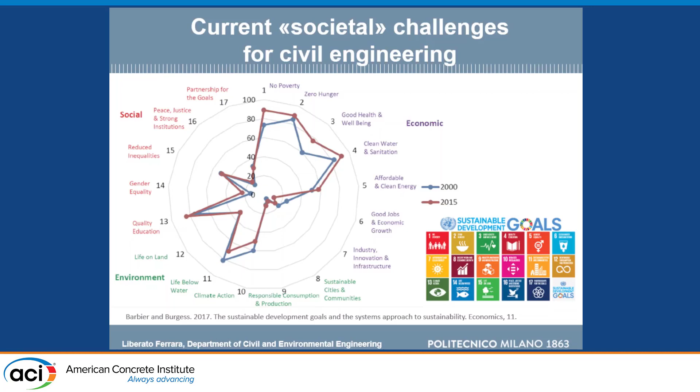We are dealing with sustainability, we are dealing with sustainable development goals, and you can see those going from 7 to 12, more or less, are the ones on which our job as civil engineers, structural engineers has to focus.

We have to cope with the fact that nowadays more than half of the population in the world lives in cities. This means we do not only need buildings, but we need transportation infrastructure for people to go from places where they live to places where they work, for leisure time and so on. This actually requires more and more concrete volumes to be produced, because we do not have alternatives to concrete if we want to build in a sustainable way.

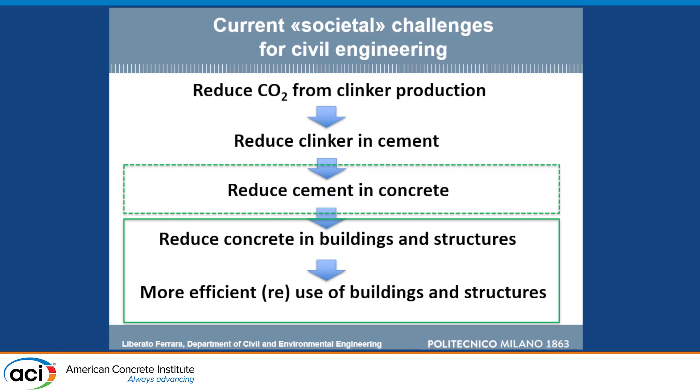But what do we have to do? We have to decarbonize cement production. We have to reduce the cement in concrete, trying to find other alternative ways to make our concrete, and reduce concrete in buildings. This also means we need to look at other performances that so far we have not looked at in detail, but we also need to find the metrics to evaluate this performance.

If we go for ultra-high performance concrete, for example, and only look at the content of cement per cubic meter, we will say that any high performance concrete, any high strength concrete, is not sustainable because it contains more cement per cubic meter than ordinary concrete. But if we look at the efficiency of this binder and this cement in getting the strength, we can say that if we look at kilos per cubic meter per unit megapascal of strength, then ultra high performance concrete is more sustainable. So change the perspective.

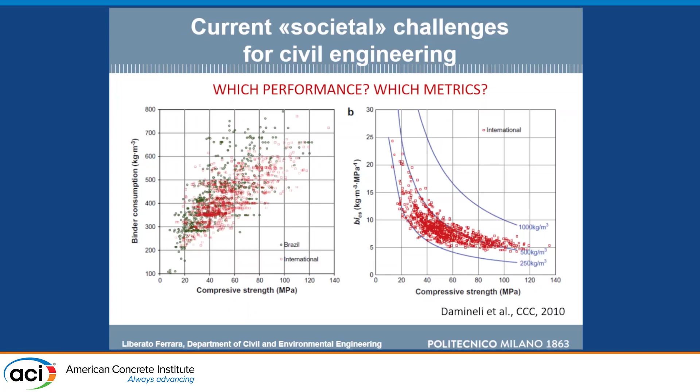And which are the fields in which we have to intervene? In the construction and maintenance of transportation infrastructure. This is our daily life when we have to cope with traffic interruptions and long queues on the highways, if we have to go to work or if we have to go to the beach during summer on holidays and so on.

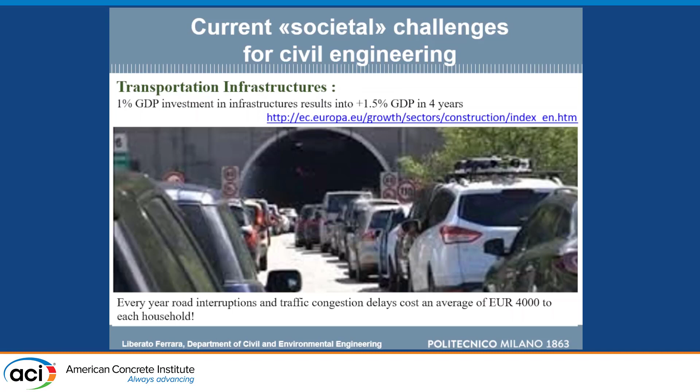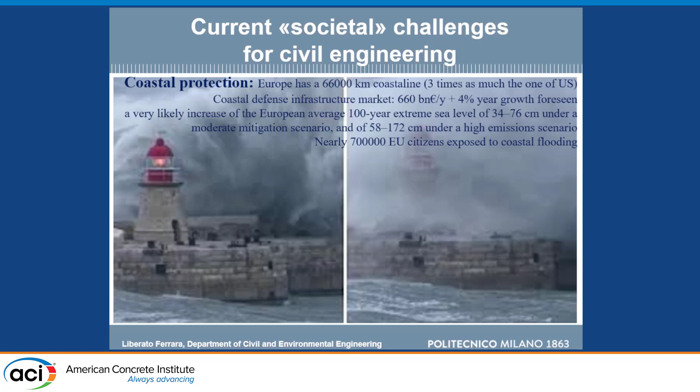We have to deal with coastal protection against climate accidents, against extreme climate events. This is becoming a huger and huger problem all over the world. And we have to contribute to decarbonize our energy supply, because this is the true bottleneck.

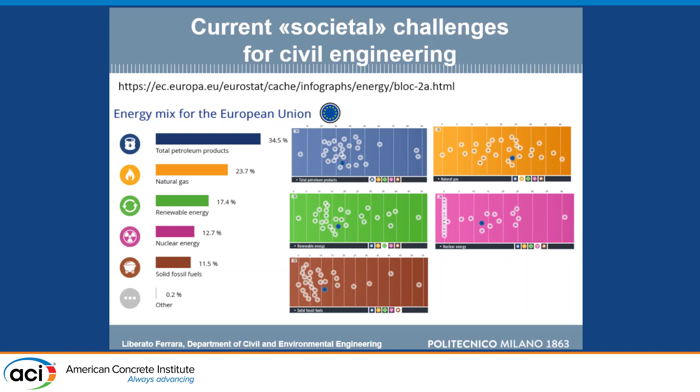Every time, if we can make our production very efficient, it depends on where we take out the power for that production, which makes the carbon footprint higher. So we must invest in renewables, and concrete is the material to be, if we want, for example, to go higher with wind energy harvesting, or if we want to go deeper with geothermal drilling.

In all these cases, the materials are subjected to very severe chloride attack, sulfate attack, very severe structurally demanding conditions for which current code prescriptions are absolutely inadequate. You look in the codes, and for durability, for chlorides, you find maximum water cement ratio, minimum cement content, that any kind of modern concrete can easily cope with and easily fulfill. So where is the driver for innovation that the codes can provide with this?

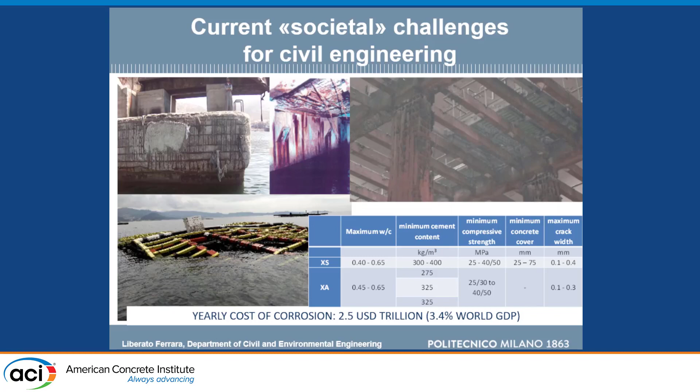So this is the scenario in which, with a consortium of European partners, we applied for funding to the European Commission some years ago. We got funded this project with a consortium of 14 partners throughout Europe, 8 countries, and I had the privilege to coordinate them.

Enel Green Power is an energy-producing company. They do not make concrete, they do not sell, they buy to build their infrastructure. So their interest was at the very last segment of the scale of the end users.

After this project, we applied with some partners for an international training network in which we tried to bring the innovation we developed in the project into education and scale up to the market. This project is now running.

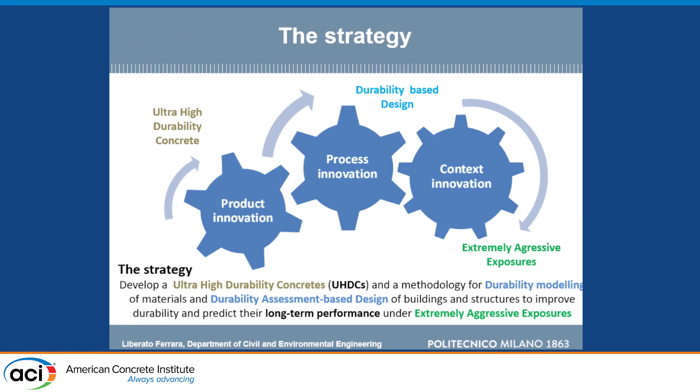We worked at the 3 levels: the product, the process, the context, and started from something which was already in the labs throughout the world: ultra-high-performance concrete.

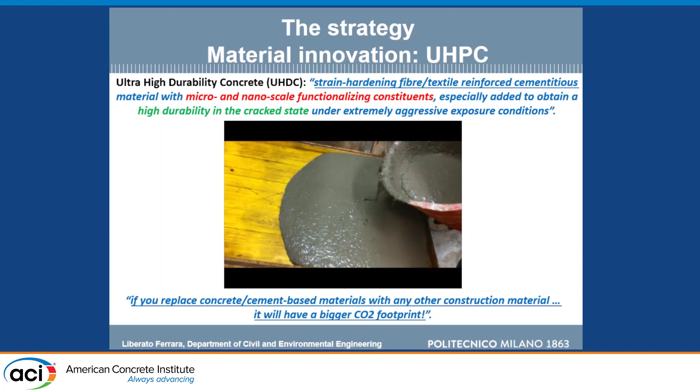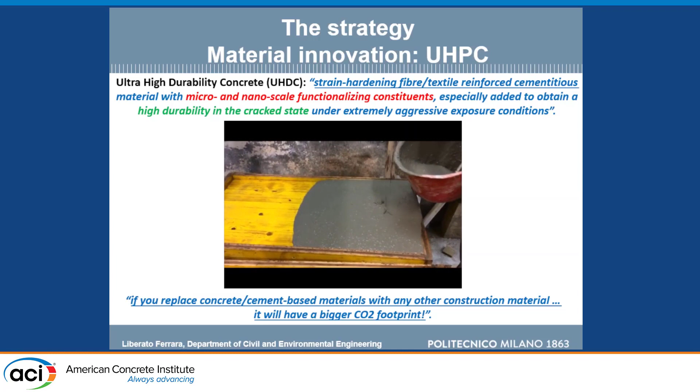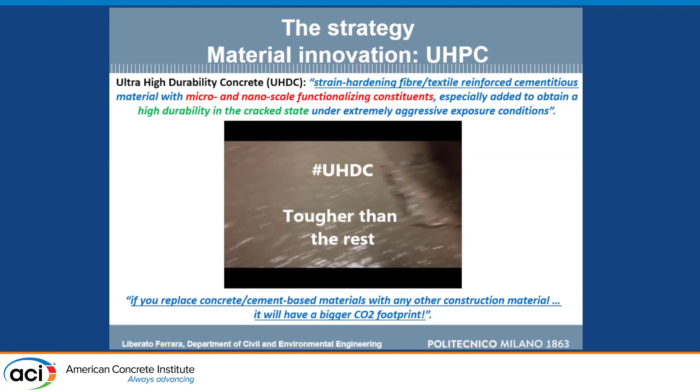The ultra-high-performance concrete, sometimes you find not a complete message delivered. You find only a message on very high compressive strength, 150, 180, 200 megapascal, that when you go to structural design, you never use, because a column cannot be made smaller than a certain size - it's not a matter of strength, but a matter of buckling. And if you have a beam, the tensile part dominates.

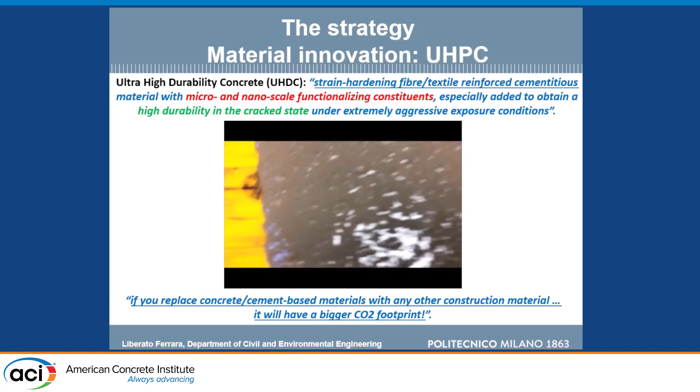So what we wanted to see was the strain hardening capacity in tension and the durability in the cracked state, which was what mattered. We achieved the strain hardening capacity. You can see there we have a strength of about 7 to 8 megapascal, but the strain hardening response up to 0.5% deformation, which is well beyond the yielding of conventional steel in reinforced concrete structures.

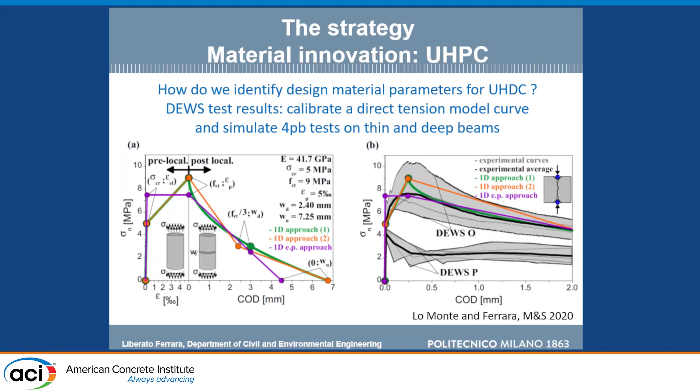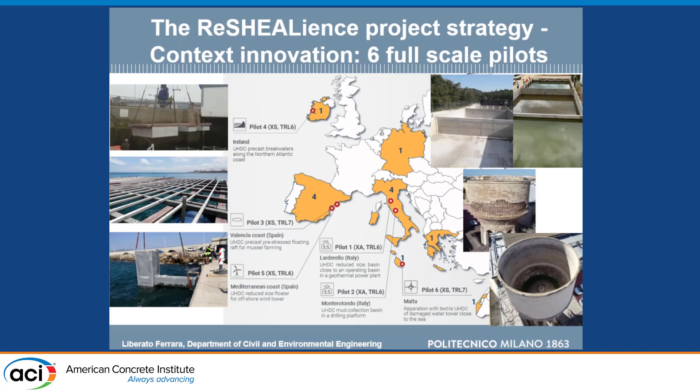Then our problem was, first of all, to scale up, casting half a cubic meter per hour on the construction site. So we had a batching plant there because we wanted to develop full-scale application. Now these 6 structures are throughout Europe, as you can see: Italy, Spain, Ireland, and Malta.

does not work. Okay. Pointer does work, okay. Okay, so probably. Let me see. Yeah, should be this. No, it's lateral pointer. Okay, got it. Yeah. Okay, it's this one.

So if you see this ordinary reinforced concrete solution, 10 centimeters thick with about 100 kilos per cubic meter of reinforcement. With our nano-functionalized materials, if you design the wall as a cantilever, 6 centimeters thick; if you design the wall like a slab supported by columns, you go to 3 centimeters thick, with significant savings in material usage.

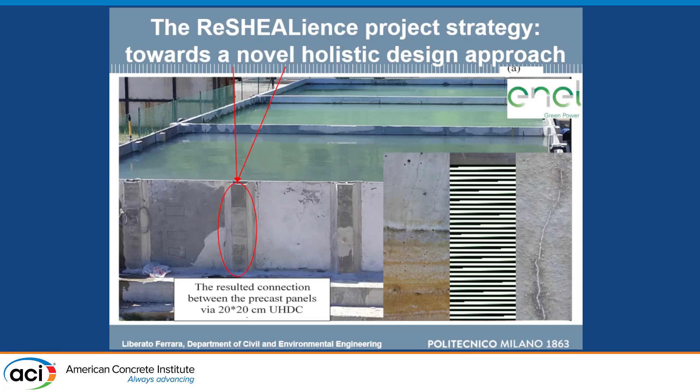This is proof that it can hold water with 3 centimeters thickness. The first load test, we were a little bit concerned. We stayed up front in order to stay safe, but it worked very well.

This is to show the importance of the matrix. If you look at the dosage, the mix design here, you see you have 600 kilos per cubic meter of cement - this mix is not sustainable. But look here: 10 centimeters thick with 350 kilos, you use 35 kilos per square meter of wall. In our case, with 3 centimeter thickness, you just use 18 kilos of cement per square meter of wall. So let's look at the functional unit and not at the unit volume of material or unit weight.

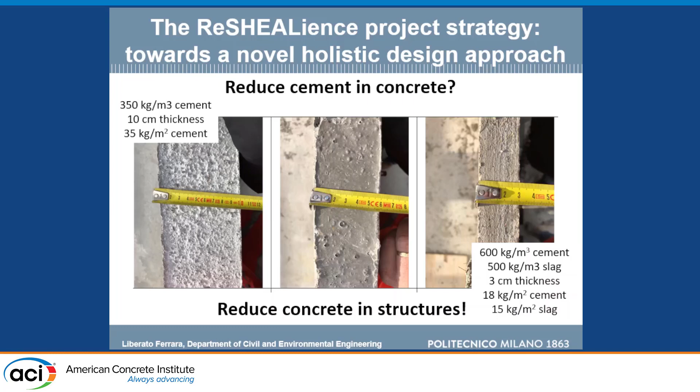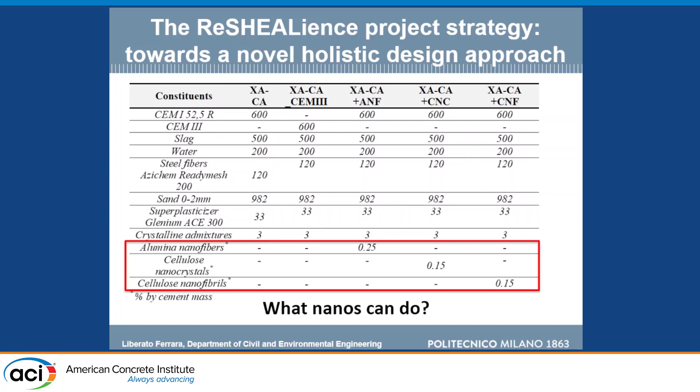Then, as I said, we wanted to strengthen the durability in the cracked state. We wanted to enhance the self-healing capacity, and we investigated the use of different kinds of nanomaterials: alumina nanofibers, cellulose nanofibrils, and cellulose nanocrystals. You can see here some of the characteristics of the materials we used.

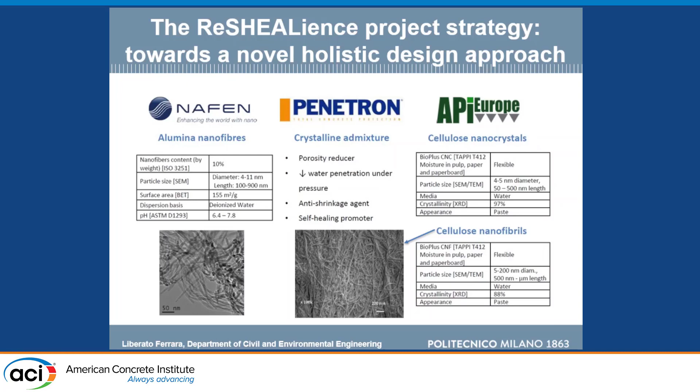For the nanofibers, we had lengths between 100 and 900 nanometers and diameters in the range of 10 nanometers. Similar dimensions, a little bit shorter, but the diameter was still in tens of nanometers for the nanocrystals and nanofibrils. We characterized the mechanical performance of the material through bending tests and indirect tension tests.

What we got, interestingly, was - if you look at the 4-point bending test, you can imagine that in the central part of the beam, you have multiple cracking. This is the key of this material: multiple cracks, each one very, very narrow, very tightly open, and it's good for durability.

With the reference material, the average number of cracks was 7, ranging between 2 and 12 according to the specimen. When we added alumina nanofibers, we had many more cracks in the same zone, which were more tightly spaced. This was strengthening at the very molecular level, which allowed us to obtain very narrow cracks.

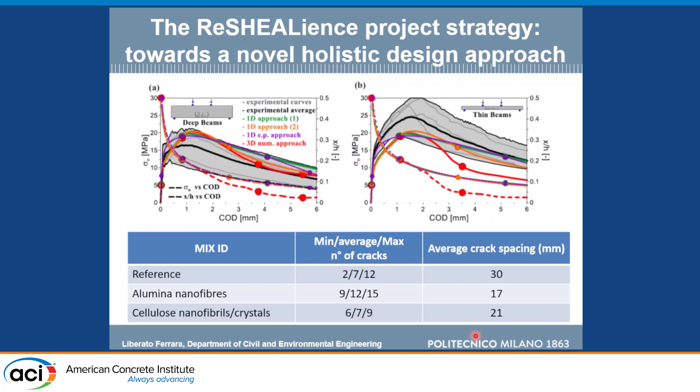So then we wanted to explore, as I said, the durability and the self-healing capacity. What we did with the specimens: we pre-cracked them up to the service design level.

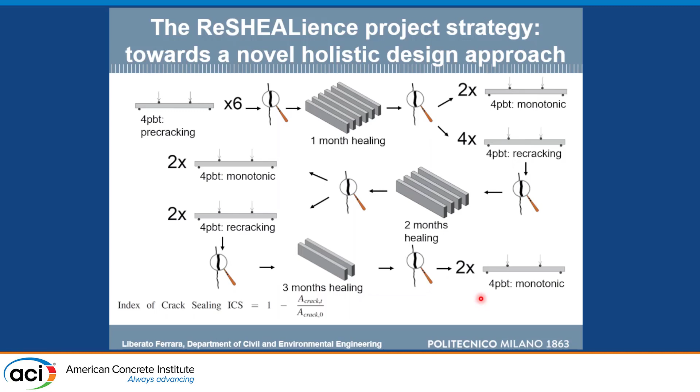We kept healing for 1 month in geothermal water, chloride water, different curing environments. After 1 month, we tested to failure some of the specimens to see the evolution of the performance, but other ones were simply re-cracked and put back to heal.

And also with nanocellulose, we were able to keep the cracks very narrowly open and have an improved self-healing capacity.

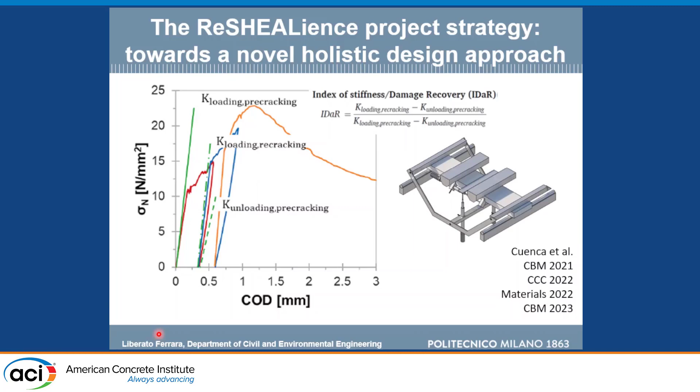This was not only on the closure of the cracks, we could also see the capacity to recover the damage. We intended the capacity to recover the stiffness, the flexural stiffness that we evaluated from this pre-cracking and re-cracking test. You can see here that the mix with alumina is here, and the mix with nanocellulose are the yellow ones, where the reference is here with less performance and wider cracks.

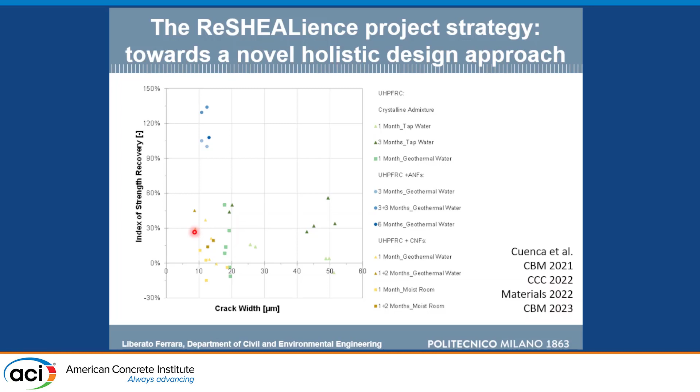Also for the capacity to recover the strength, which is an important design parameter, you see that alumina nanofibers are in the range of 100%, meaning that you completely healed and got back the same performance as for the virgin material. Some images here show, you can see clearly, one nanofiber, alumina nanofiber, crossing this crystalline structure which was formed.

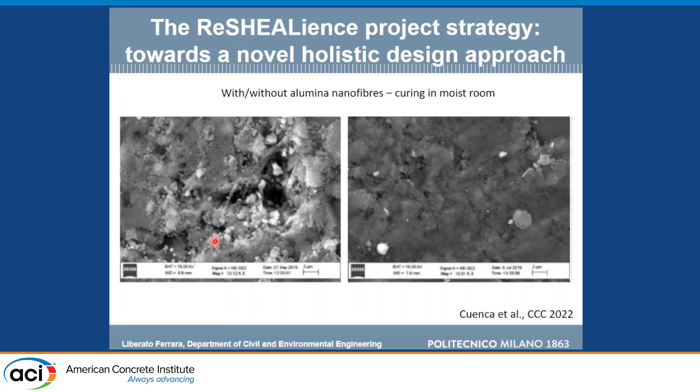The nanofibers also help, but they are hydrophilic, they capture hydration, they foster the hydration of the cement, and this is in moist room.

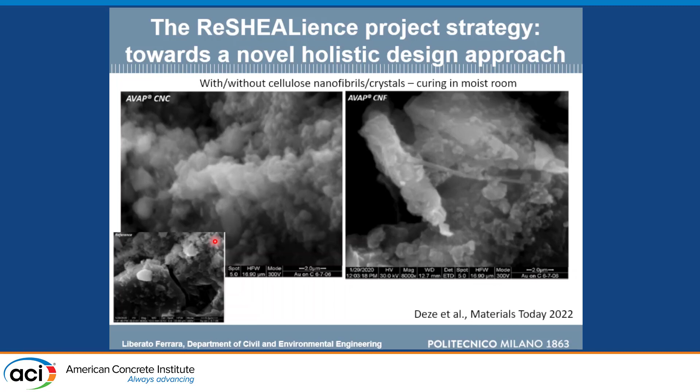And some images also on how the cellulose nanocrystals, the cellulose nanofibrils, really acted as nucleation sites for the hydration of cement. So then we went up in scale and designed a real structure.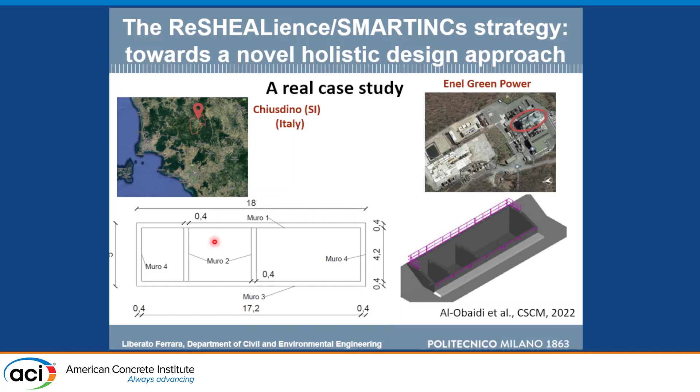This is a basin in a geothermal power plant located in Tuscany. You can see that it's about 20 meters by 5 meters, and the height of the walls are here. On one side you have about 5 meters deep, and on the other side you have 3 meters. On the 3 meter side you can access it also with vehicles and machinery for the maintenance.

So the original reinforced concrete design solution has a wall which is 400 millimeters thick with very deep cover, because the reinforcement has to be protected from the attack of the water, which contains chlorides and sulfates.

When we ended up designing with UHPC, we used in this case a hybrid structure. The height of the wall, 5 meters, did not allow us to only use fiber reinforcement. We scaled it down to 15 centimeter thickness, or if you design slabs and buttresses, the thickness can go down to 10 centimeters. So it's true that the mix design is completely different, but it's also true that you use much less material.

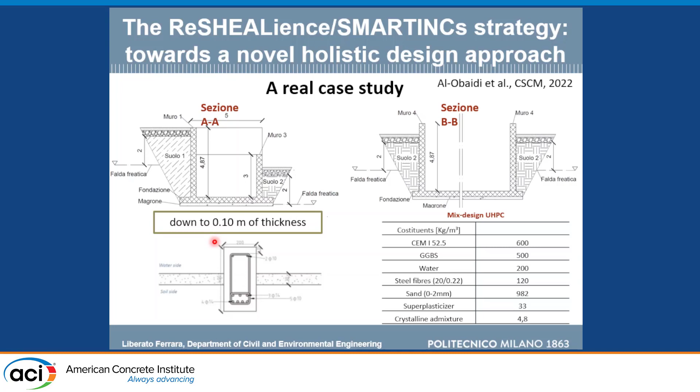There is another important thing to take into account in the metrics. When you look at this mix design, the steel fibers are already in the mix, so they count as a burden or as a cost voice for the cost per cubic meter of the material. When you have ordinary reinforced concrete, the reinforcement has to be taken separately, but you have to evaluate them both in order to have a complete picture.

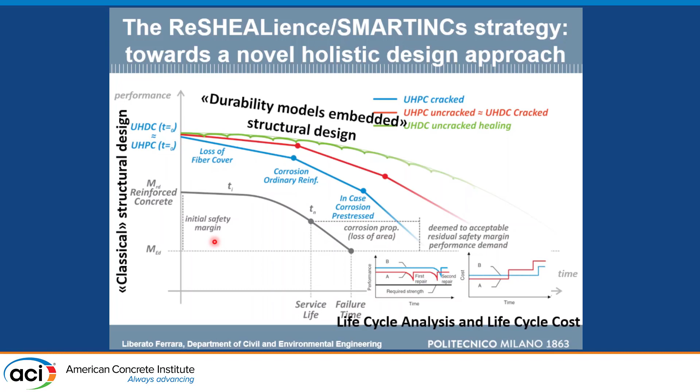So we performed the life cycle analysis, and what we wanted to see was how the performance of the structural bending moment, for example, capacity, decreases over time because of the aggression, or is maintained because of the self-healing. So we used a different kind of aggression mechanism for chlorides.

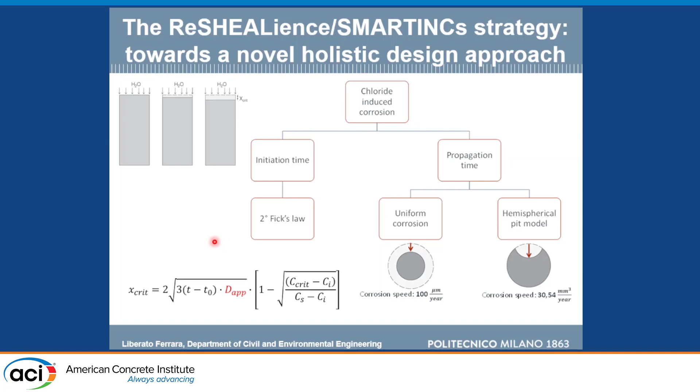The Fick diffusion law governs the diffusion of the chlorides. When the chloride reaches critical content at the reinforcement, the corrosion starts, and depending on the scenario, you might have uniform corrosion or hemispherical pit corrosion.

And we realized that, for example, for the ordinary reinforced concrete structures, you actually have a service life not of 50 years like it's estimated from the prescriptions, but you have something around 20 years, and this is critical.

Another thing: the reinforcement starts corroding, and according to studies we found in the literature, when you have lost 20% of the cross-section, the pressure of the rust from inside is so high that you have formed 1 millimeter wide cracks. So you have to intervene, because a wall with a crack 1 millimeter wide is no longer serviceable.

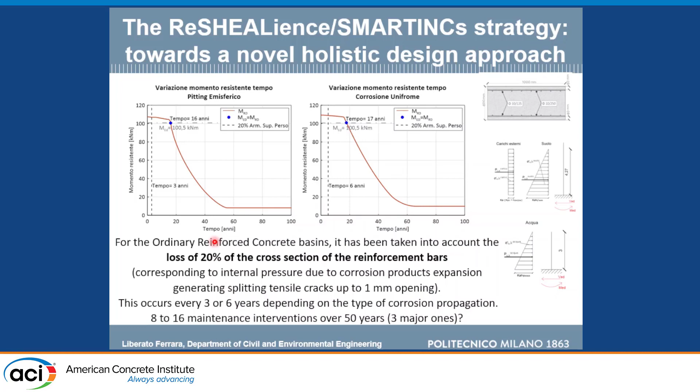And this was confirmed by the maintenance operations, extraordinary and unpredicted, that the company had to do. So this adds up to further burdens to your original CO2 and the original cost. When we designed it for UHPC, we employed the methodology in FIB model code, or ACI 544.4R.

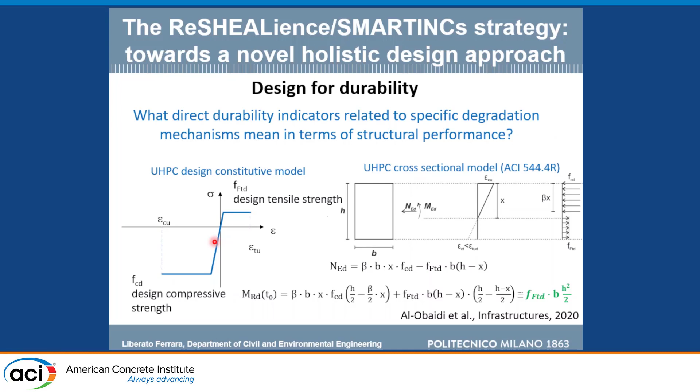So you basically compute moment equilibrium with a stress block in compression and a stress block in tension. And what we did, we reduced the cross-section as long as the attack proceeded. Very severe assumption in this case. But we said, let's start with that.

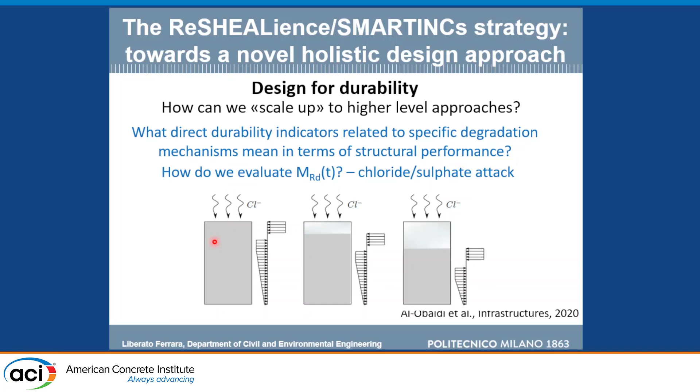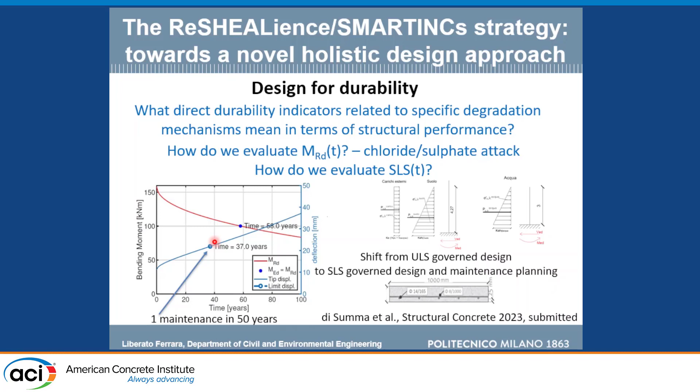So we embedded into the moment equations the Fick's law or other degradation laws. And we realized this: surely the durability is extended, but also we realized that probably it's no longer the ultimate limit state which governs, but the serviceability limit state, because you have slender structures which are more deformable. We said when the deflection reaches 10% of the thickness, it's already too deformed, so you have to intervene. But still, for the slabs, we used yield line analysis, because you have to design in a two-dimensional way, and estimated the service life.

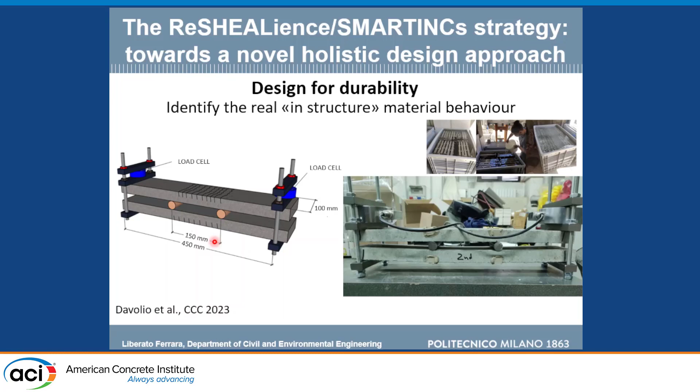Then we wanted to see - this assumption of removing the attacked layer is too severe. The material probably is going to keep its performance. So we developed this setup to keep the material and the specimen under sustained loading while they were exposed to chlorides, geothermal water, or tap water for comparison.

And at the end of 1, 2, 3, 6 months and so on, we removed some of the specimens and tested them in bending or in direct tension. So it was a very huge experimental campaign, more than 200 specimens which were tested up to 1 year exposure, containing either alumina nanofibers or nanocellulose, and were investigated.

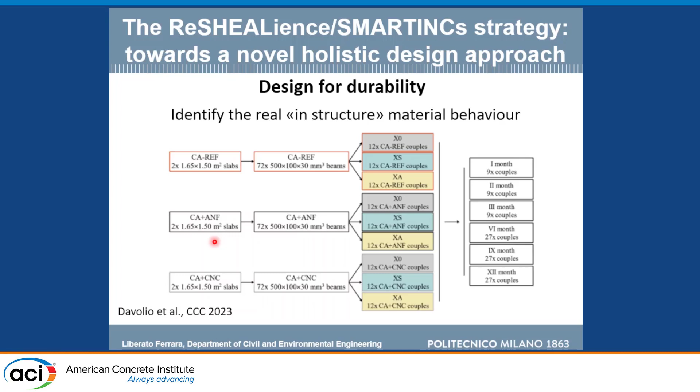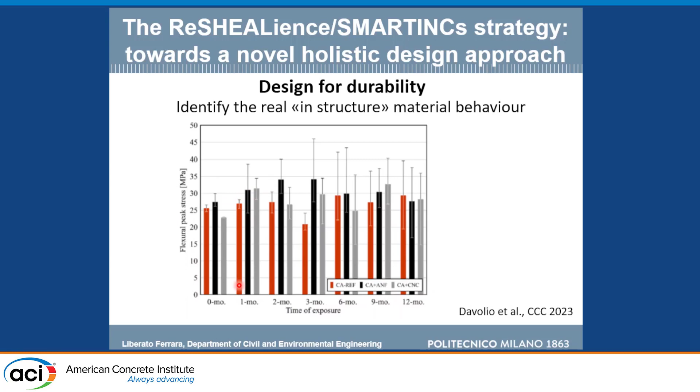And most of all, what we observed was that after healing in the UHPC with nanomaterials, new cracks were formed and not the old ones reopening, because the healing was so tough that it was easier to form a new crack. And you can also see here, compare the red one, which is the reference, with the black and the gray. The material with nanofibers was also able to maintain a higher level of stress.

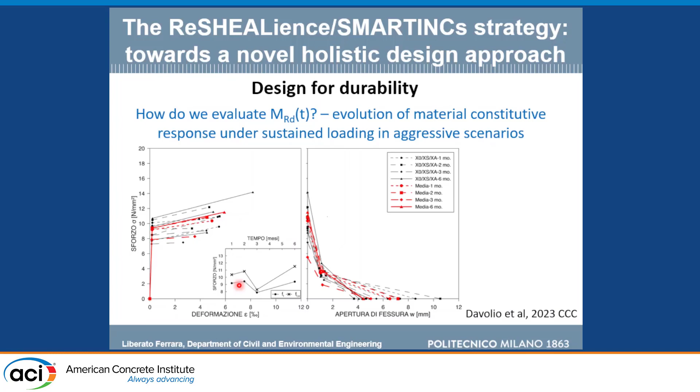So we identified this time-evolving constitutive law of the materials. Obviously, we performed tests up to 1 year. You cannot go longer - students have to graduate at a certain point, you have to allow them to finish. So we validated with numerical models to extrapolate this to the whole service life of the structure.

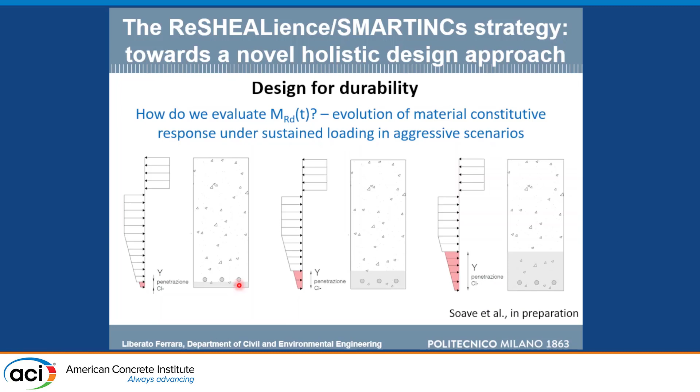So what we simply did is, when we computed the cross-sectional equilibrium for axial force and moment, we used time-evolving constitutive laws. And we ended up estimating, you can see here, a service life longer than 100 years when we used our UHPC with nanomaterials. This is the case of the cantilever wall, and this is the case of the slab wall.

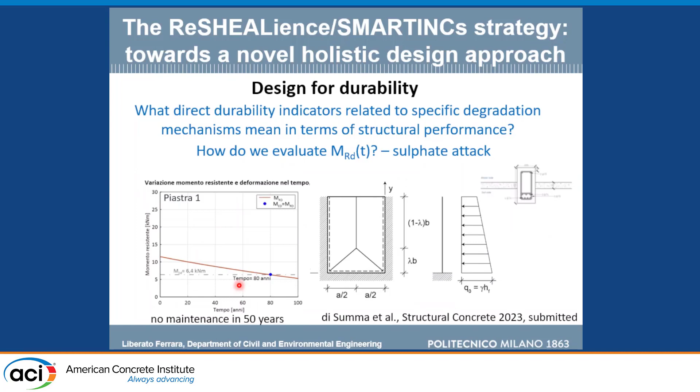Then you plug into your life cycle analysis software all the data that you need, and you end up showing that in the end, UHPC, with different mix compositions and different mechanisms of aggression, is always more sustainable - this is just one indicator - than the ordinary reinforced concrete solution.

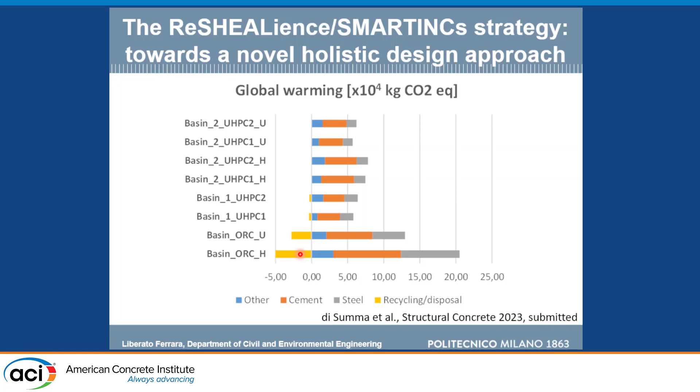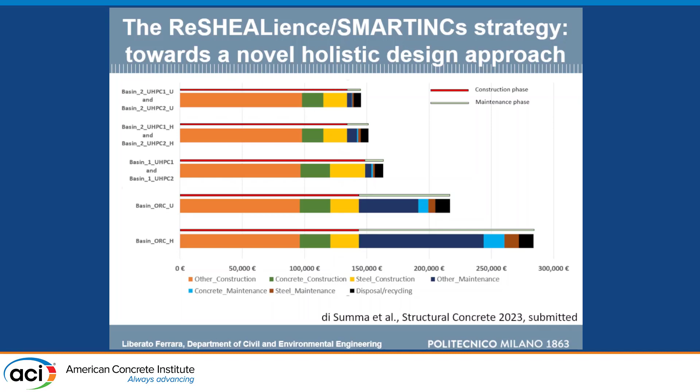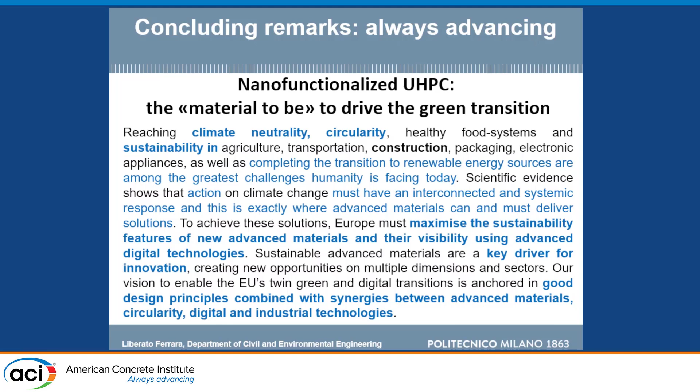The huge saving that you have is that you do not have almost any significant maintenance cost - very limited, just to keep the structure functioning - and you do not have to intervene. So definitely, with this, I call it nano-functionalized UHPC, where we are really able to improve the durability, and we mean this as the capacity of the material to maintain its performance over time so that your structural performance does not decrease. This material will help us in reaching the climate neutrality, circularity, and sustainability objectives that we have to always work for.